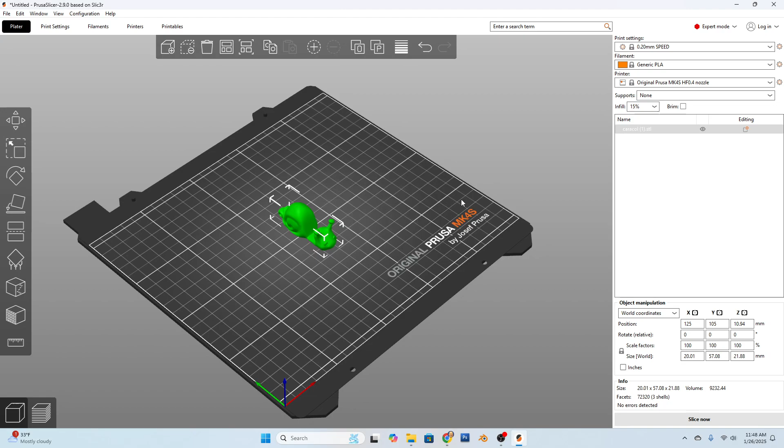I will open the download folder. I'm just going to open it. Okay, so there he is. This represents my printer body, so it'll show me the space. And essentially, that's all you need to do.

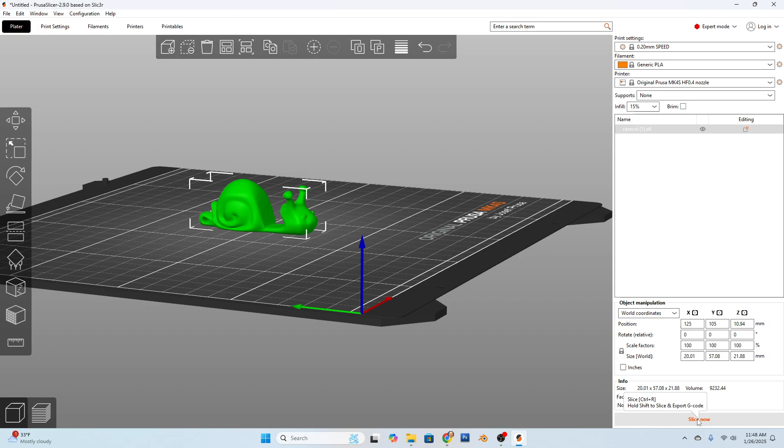If you've ever heard the term slicing, basically it's telling your 3D printer how to actually print this thing. So there's a slice now function. You click slice now. As you can see up here, my millimeters, which is the quality basically of the print, is 0.2. My printer goes down to 0.1.

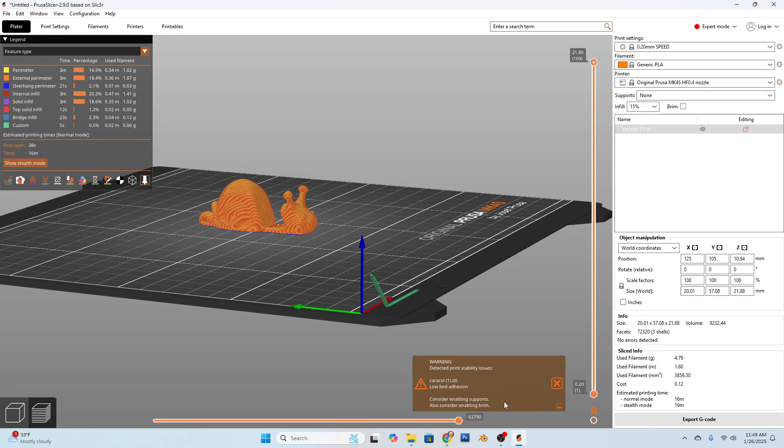So better definition, but it takes a little bit longer. Once you're sliced, it'll tell you if you have stability issues. Let's see what this one is. Low bed adhesion. That means the amount of the object touching the bed is low, so it could actually slip off your printer. There's ways to fix that, but we can get into that another time.

Here's how many layers this thing represents, and it'll kind of show you how this thing prints from the ground up. That's kind of sweet.

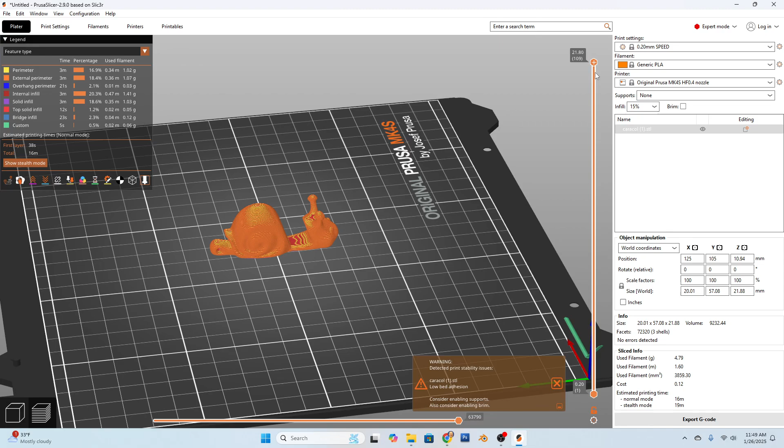Let's say you wanted to change the color of his kind of top and maybe his little antler things there. You click this button, and from that point up, you can change colors. So that is as simple as it is.

You would do another slice now, you would correct any issues. You can see down here, it's going to take me 16 minutes to print, and it will cost me 12 cents of filament.

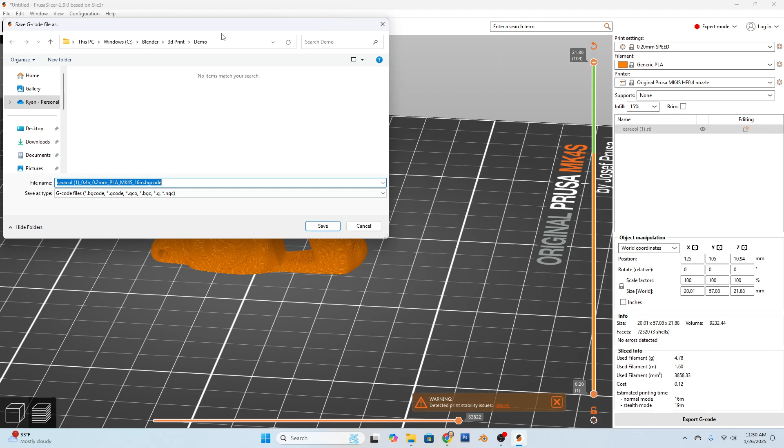So when you do your export G-code, I don't think I have a jump drive in there right now. You would export your G-code, which is basically the instruction set to tell the printer what to do, onto your USB drive, which I don't have one plugged in. You literally copy and paste it, walk it over to your printer, stick it in. It will recognize it as something that wants to print, and it will begin printing for you.

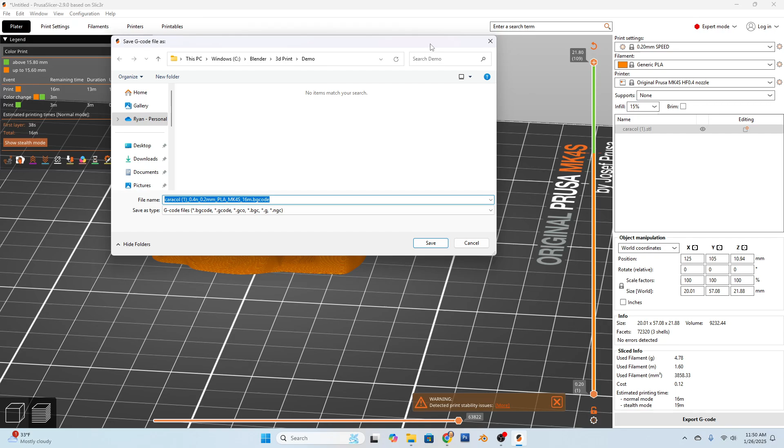So that is 3D printing without the 3D modeling. You could do that today if you have a 3D printer. Some of the basic ones begin at like $200 from Bambu Lab, and they're really good ones. A lot of people buy them just in general, even for their print farms. So that could be a starting point for you.

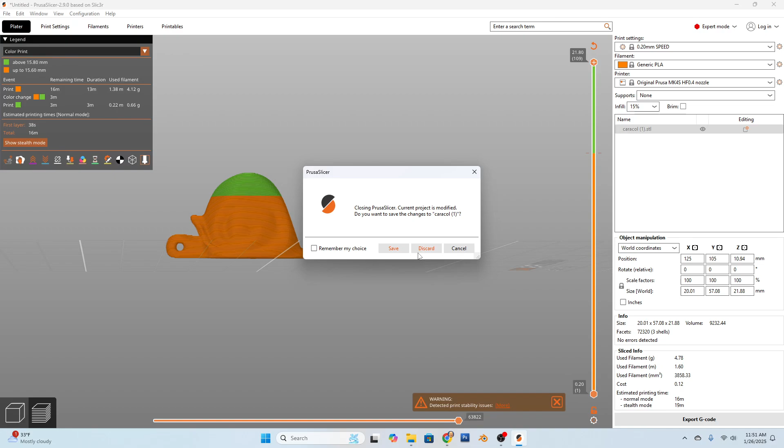Now I'll just show you how to do this very basically, just how to make an edit. I'll do this just to show you how easy this could be if you learn the software.

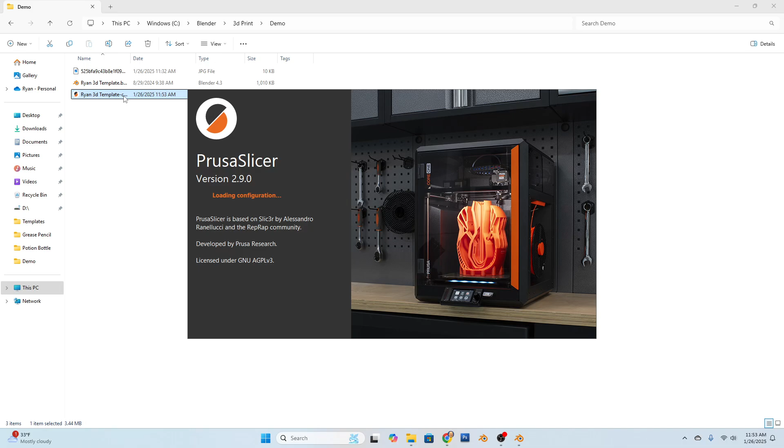Click it open, and as you can see now it's bigger. Same process - I would do a slice, fix the stability issues if there are any, export it to my jump drive and then move that over to the printer.

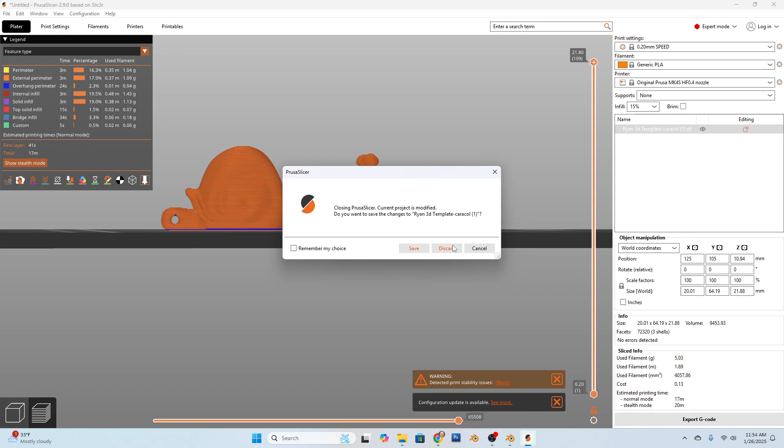So that's actually how you make an edit to an existing STL file. Now let's say you wanted to make your own - this is kind of the final topic. Hey, I want to get into 3D modeling and make my own stuff. How do I do that?

So let's do this - let's say we want to make a 3D version of a chess pawn. I guess we can use my template again. Come here, delete that. Are my screencast keys on? No, they're not. Let me turn those back on. Okay.

Now I want to import a reference image. This is a good way to start things. I'm going to scale this up to make it bigger - what does that look like in relation to that? It's going to fit. I'll move this up a little bit. And just so you can watch this better, I'm going to change the transparency of this image so you can see it, and drag that down.

Now I want to get my 3D cursor right there. I'm going to insert a mesh single vertex right there. I'll be in edit mode, and then I'm just going to start extruding this thing out and following this shape. So bear with me, I'll go super fast with just a little detail.

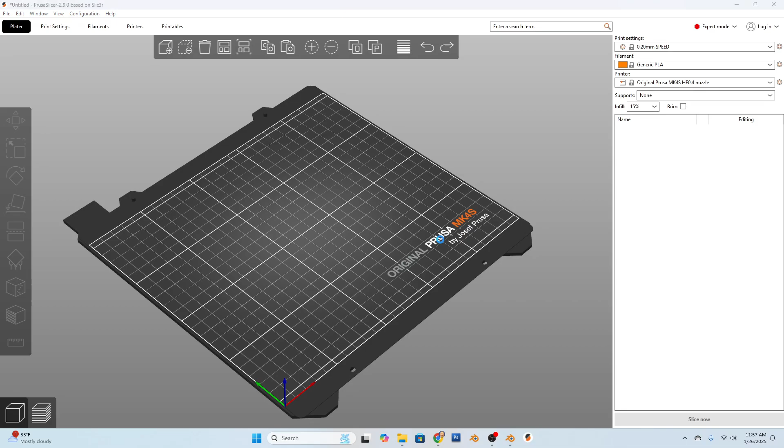There it is - you can tell I didn't spend a lot of time making this nice and sharp, but that's the general idea. So real fast, I just made myself a chess piece, it's actually pretty big. 16 open edges - I didn't do a repair on it, so there's a little repair function right here. Now it's ready, I'll slice it.

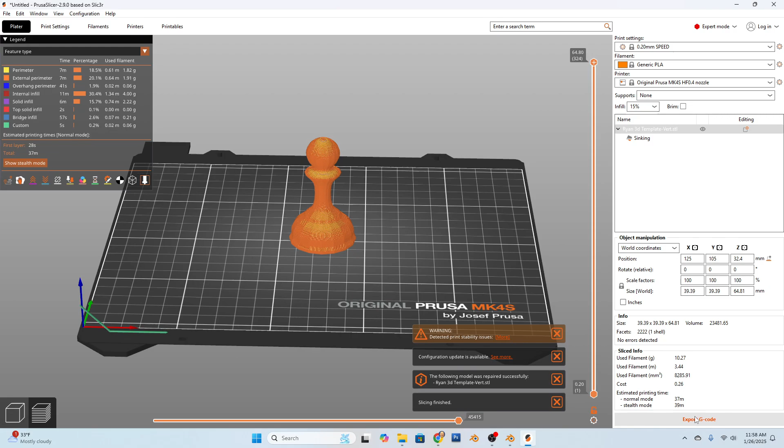Let's say I want to make the top of that a different color. And boom, slice it again, export my G-code, and then it's ready for printing. There you go - three main topics. Should tell you a little bit more about 3D printing. Thank you.